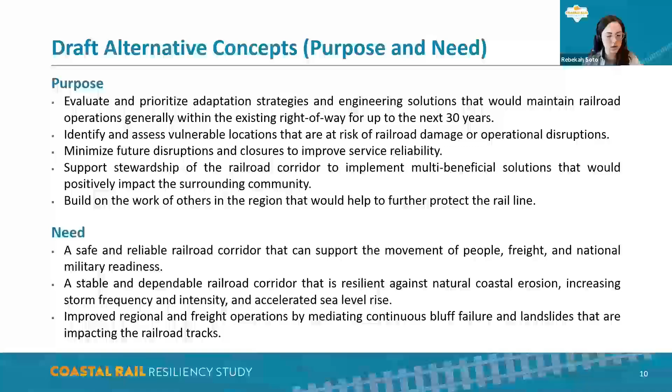And the reason why we need to do this is because ultimately we need to make sure that the railroad corridor remains safe, stable, and dependable, with passenger and freight rail service being able to move and operate safely.

So then we can go back and review and continue to refine those concepts. But where we're at right now is presenting them to you and getting some of your initial thoughts to continue to guide us as we go through this process.

So those alternative concepts, what we've done is we have separated them into three categories. We have bluff side concepts, which would be the landward side of the rail corridor, beachside concepts or the seaside, and then we have the rail concepts, which focuses on the rail, on the actual rail itself.

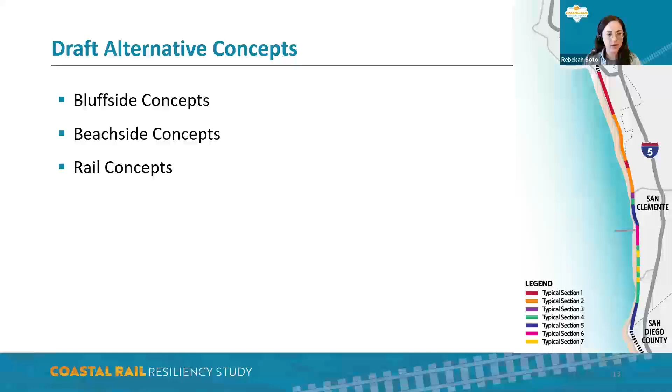Here, as you can see, in those three different categories, we've grouped the different alternative concepts or solutions. There's no order of preference, they're in there all as a group. Ideally this is to serve as a bit of a menu for the 7-Mile Rail segment. The different sections and areas have different needs, different nuances to the erosion challenges in each section. So what these aim to do is provide us a list of different options that may be applicable throughout the corridor, but maybe not through the entire length. Maybe we need to pick a couple from one category and apply it to one section, maybe a couple from another category to another section, and so forth. But ultimately, we have this list broken down into these different categories.

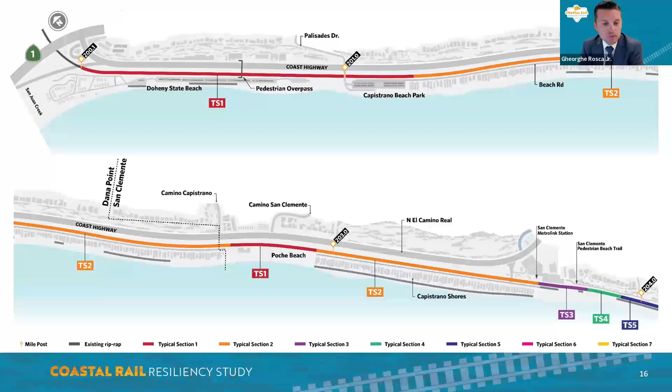On the next two slides, you'll see a map with milepost markers. Starting from the top left, you'll see milepost 200.1, in the city of Dana Point, with a color-coded line tracking the center line of track. These color-coded lines have a TS with a number after them, meaning typical section 1 or typical section 2. We have a total of 7 typical sections, labeled at the bottom of the slide, with a legend showing the color coding for each.

As we go through this entire 7 to 7.5 mile stretch, in the next slides describing each typical section, you'll see the land use characteristics on either side of the track change. On the beach side, you may see ocean water with a lot of sand or not much beach sand, maybe other infrastructure like parking lots, or sometimes even homes in front of the railroad. Then the rail line, then a pedestrian trail on one side or the other. On the landward side, sometimes there are bluffs, sometimes homes on top of those bluffs, and those bluffs could be taller or shorter.

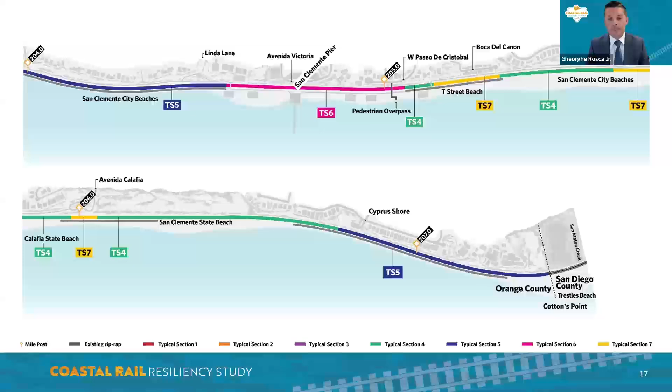We're trying to look at this entire 7.5 mile stretch and delineate the typical section for the existing condition, then apply whatever applicable draft alternatives from each of the three lists Rebekah mentioned, from the bluff side to the rail side to the ocean side, the beach side. So we'll go ahead and start with the first typical section.

On the right, you'll see a cartoonish figure showing the ocean water with a decently wide beach, some minor riprap, a parking lot, followed by the actual railroad right-of-way with the track, then Coast Highway and the bluffs. On the left side of the screen, you'll see a picture of what that typical condition looks like out there.

At the bottom of all these slides, you'll see a milepost marker and legend, showing the color of the typical section from the first map, and the milepost stretch being referred to, the limits.

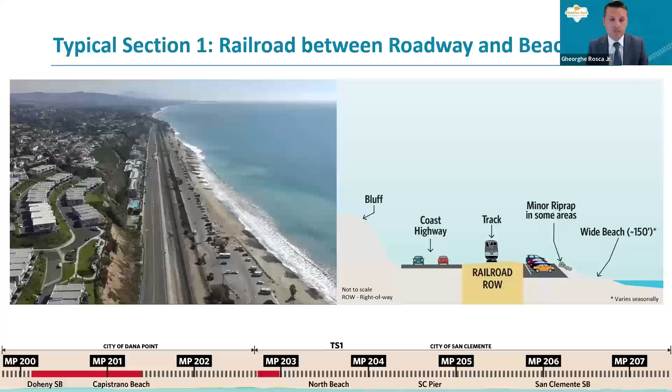For this particular typical section, we find ourselves in the city of Dana Point. There's one long stretch from milepost 200.1 to about milepost 201.5, and then a little bit more, about a quarter mile, from milepost 202.75 to 203, which goes into the city of San Clemente portion.

Looking at the bluff side, beach side, and rail side, starting with the bluff side draft alternative concepts: the bluff in this particular typical section is on the other side of Coast Highway, at a good distance away, not creating any kind of risk to the railroad at this time. So the determination was that no action needs to be taken at this time.

On the beach side, the beach is separated by some minor riprap and a parking lot, so the railroad right-of-way is being protected by those land use characteristics. The beachside draft alternative being considered here looks at watershed modifications to increase beach sand supply, dealing with the natural erosion that happens through rivers and creeks bringing sediment into the ocean.

And that's something that is outside of the railroad's control, so that would be something implemented by others, or for the railroad to collaborate with other regional beach sand projects in the area. And then lastly, on the rail side, we are looking at alternative materials for critical railroad infrastructure to reduce life cycle costs.

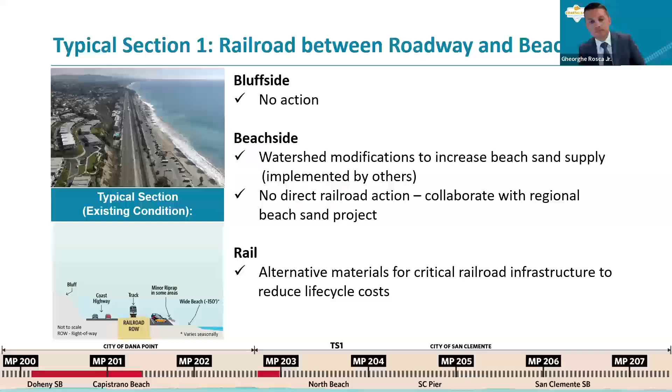Typical section 2. This again is the orange stretch there on the bottom. There's 2 stretches of this. On the right-hand side, you'll see the cartoon kind of typical section where you have, again, the ocean water with some beach and some minor riprap, followed by a decent stretch of residential area, then the railroad, followed by a trail, bike trail with the Coast Highway 101 there, and then the bluffs.

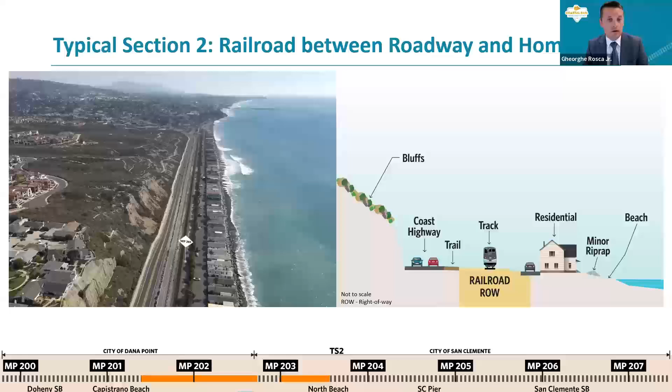So when we look at the concepts that would be applicable to this section, on the bluff side, similar, the bluff is far enough away on the other side of Coast Highway, doesn't pose a lot of risk to the railroad, so there is no action to be taken for now.

On the beach side, similar to typical section 1, just looking at where that beach sand supply is naturally coming from. So others who have that jurisdiction would be looking at that, and then any collaboration with regional beach sand projects. And then on the rail side, similar to typical section 1, we're looking at alternative materials for railroad infrastructure to better withstand the marine environment.

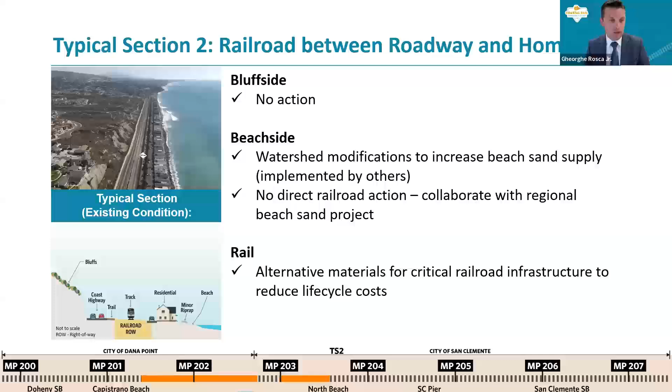Typical section 3, there is the stretch here at North Beach, immediately north of the station, where you have the ocean with a wide beach, approximately about 100 feet. You have a riprap area followed by the railroad, and then parking lot on the left-hand side. And there's really no bluff present here in the immediate vicinity of this short typical section.

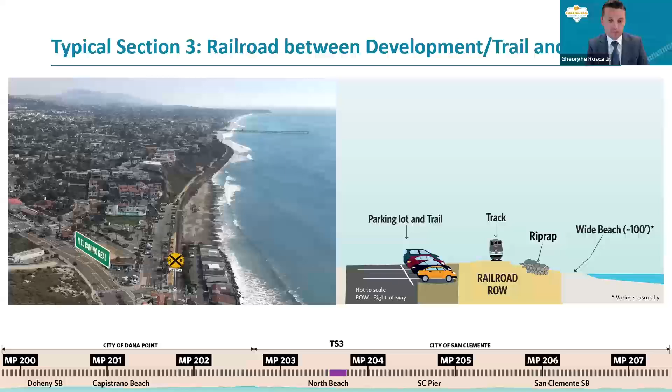As you can see on the bottom, that purple color there is a very short stretch. So on the next slide, you'll see that on the bluff side, there are no bluffs in this typical section, so there's no action to be taken. And then on the rail side, again, just looking at alternative materials to be able to withstand the marine environment.

And then on the beach side, this is where we can consider a lot of the beachside draft alternative concepts that are presented in your handout. Again, just want to remind folks that the handout is in the link that was provided in the chat. So if you look at that and reference back to the slew of beachside or bluffside concepts, we're looking at all of those, and if they are applicable at every typical section along the way.

So we have things like riprap placement, similar to what has been done in the Mariposa area, a very thought-out way of placing that riprap back into place, or looking at a more engineered rock revetment, or even a vertical seawall, or a hybrid of these in terms of a hybrid structural solution.

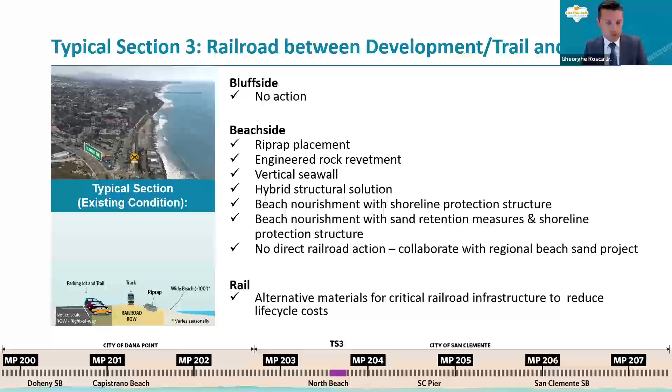Or you could look at doing beach nourishment with a shoreline protection structure, or a beach nourishment with some kind of sand retention measures and a shoreline protection structure as well. And on top of all of that, there's also the option of collaborating with a greater regional beach sand replenishment project. Next slide.

For typical section 4, again, on the bottom, you'll see the green stretches where this typical section applies. And this is where you're starting to see the changes in what's happening, especially on the bluff side, in relation to how tall those bluffs are, and if there are residential structures up on top or not. So as we go through typical sections 4, 5, 6, and 7, you're going to start to see some of these nuances play out.

So with typical section 4, you have the ocean, the beach sand there, riprap in some areas, the track, the trail with bluffs and residential homes on top.

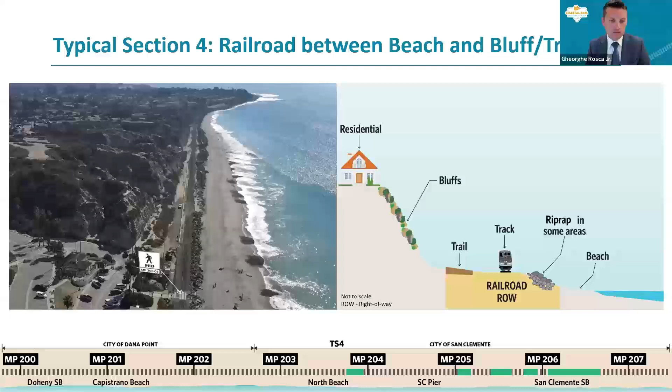On the next slide, the type of draft alternative concepts being considered here on the bluff side includes catchment walls, similar to what you see at the Casa Romantica area. These are blocking the slide and debris that's sloughing off of these bluffs.

You could do stabilization and grading, where we try to buttress the toe of the slope so it doesn't slide out. You could look at tieback or soil nail or pin pile wall solutions. This will be a much larger structural draft alternative concept that seeks to stabilize the entire bluff, or look at ground improvements, or hydraugers that lower the hydraulic pressure in the water seeping through the bluffs, controlling and getting that water out to provide greater stability.

On the rail side, through these typical sections, there is potential in some areas to also look at elevating the tracks. When we talk about elevating the tracks, we're talking probably a couple feet, just to not have to deal with the king tides and some high tides where you're getting wave action. There's also the alternative materials, as I mentioned in the other typical sections.

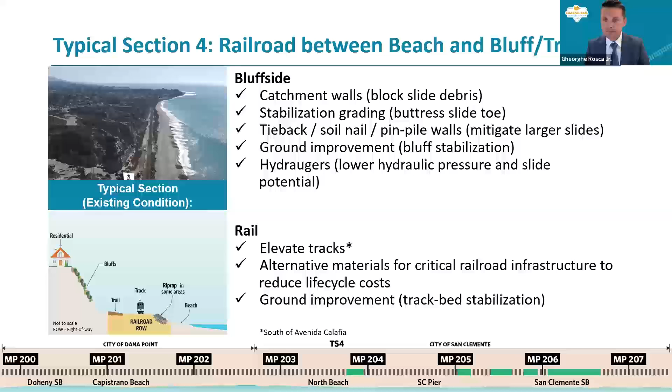On the beach side for typical section 4, again, a variety of draft alternative concepts could be applied here, everything from riprap placement to an engineered rock revetment or a vertical seawall, a hybrid structural solution of those three, or beach nourishment with shoreline protection or sand retention, done in collaboration with other regional beach sand replenishment projects.

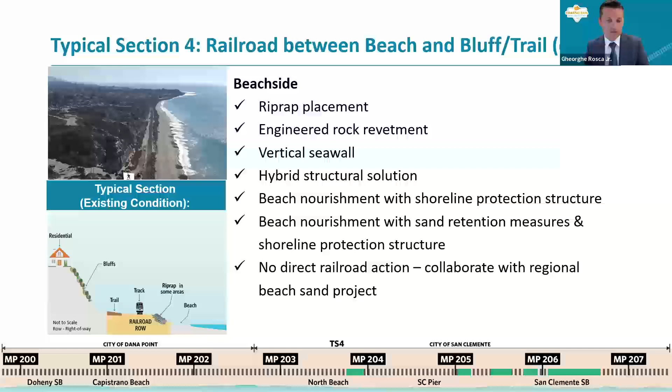Next slide, typical section 5. Here, on the cartoon figure on the right, you have the ocean with minimal to no beach sand, riprap in most of those areas, then the track within the railroad right-of-way. The trail is present in some areas, and then you have the bluffs with residential spaces on top.

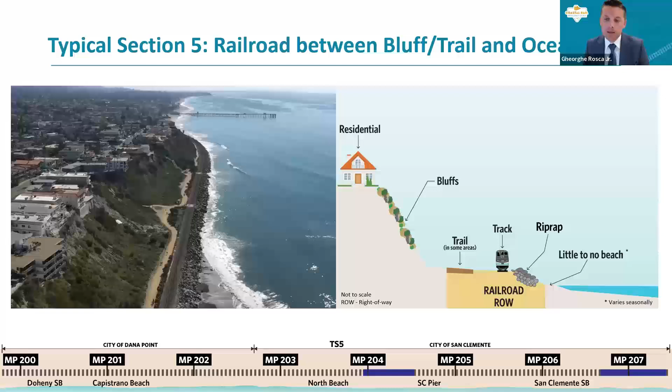On the bottom of the slide, you'll again see that purple-blue color from milepost 204 to about 204.5, and then again at the southernmost stretch in milepost 206.7 all the way down to 207.4 at the county line.

So the draft alternative concepts being considered at this typical section on the bluff side include catchment walls, or grading the slopes for greater stability, tieback solutions with soil nail or pin pile walls, or ground improvements, even maybe upgradient cutoff drains, trying to find where that source of water is coming from and mitigating it before it can seep into the bluffs.

And the last draft alternative concept uses hydraugers, trying to lower the hydraulic pressure by removing that water from inside the bluff.

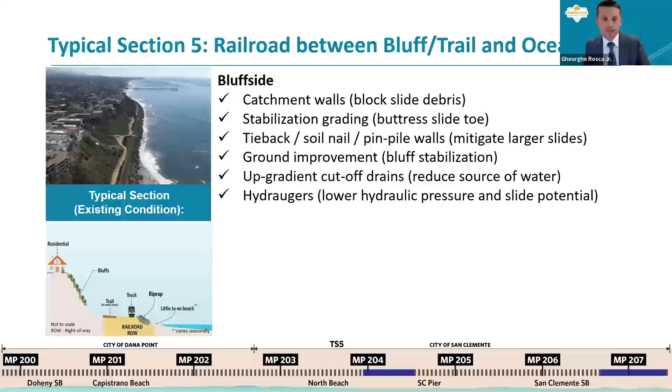Next slide. On the beach side, also looking at riprap placement, engineered rock revetment, or a vertical seawall, or a combination of those, as well as beach nourishment options with shoreline protection structures or sand retention measures. On the rail side, elevating the tracks as well as alternative materials to help with the life cycle cost of the rail assets.

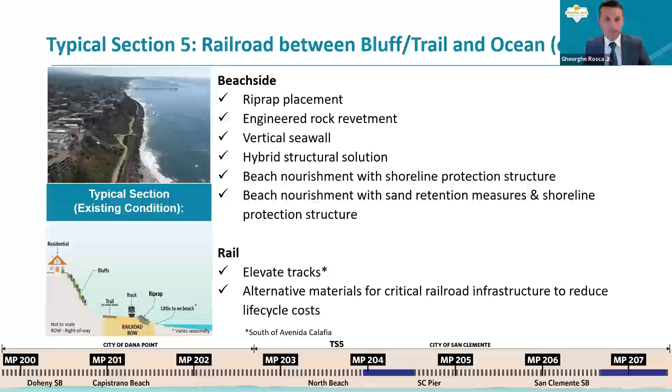Next slide, typical section 6. This one is right around the pier and north of the pier, about milepost 204.5 to milepost 205.0. On the right-hand side you have the ocean water with a wide beach, approximately 100 feet, followed by the trail, then the railroad, then the bluffs.

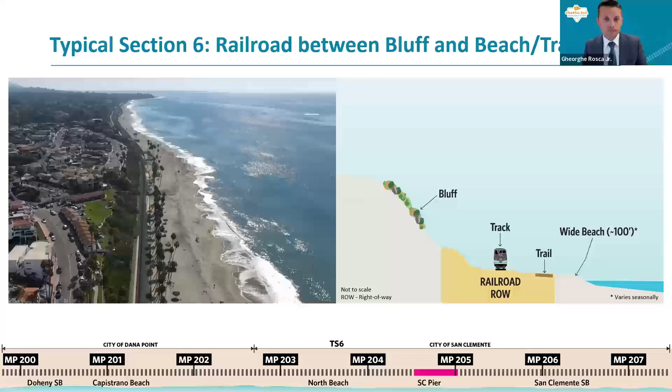So on this particular typical section, next slide, on the bluff side we're looking at just catchment walls to block any of the debris that might be coming off.

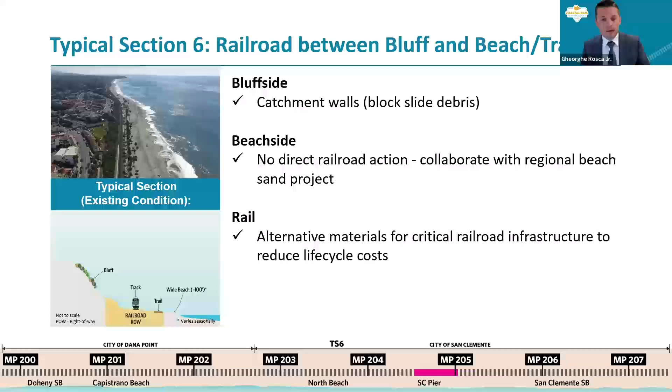On the beach side, there is a decently wide beach protecting the railroad there, so we would be collaborating with others that might be leading any regional beach sand projects. And for the rail itself, just looking at alternative materials to support the life cycle of the rail asset. And then on to our last typical section, typical section 7.

This one has the ocean water with some beach stretched there with riprap in some areas. Then you have the railroad with the trail, and then a much smaller bluff, so to speak, with residential on top. In the picture on the left, there are a couple stretches where that bluff is down below, as opposed to that very tall bluff you see further down beyond this stretch.

So in this milepost 205 to 206, that 1 mile stretch, you'll see a lot of this kind of shifting of these typical sections happening, where the bluff is very low, not that tall, and then boom, it goes right back up to a much taller bluff. These typical sections of the existing conditions just change here pretty quickly.

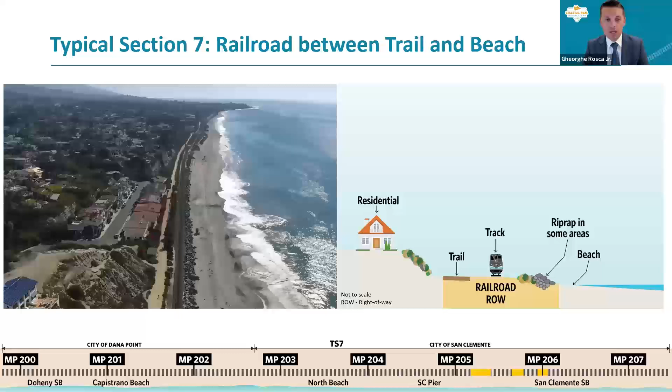On the bluff side, because those bluffs are really not that tall, we are proposing that no action be taken there. However, on the beach side, looking at an engineered rock revetment with the wider beach that is present there, I think it would last, especially for the short and midterm duration. And then looking also at beach nourishment with shoreline protection structures, while collaborating with others in the region, looking at the beach sand supply, where that's coming from, and the regional beach sand programs or projects, and collaborating with them. On the rail side, we would be looking at alternative materials, again, to help with the marine environment.